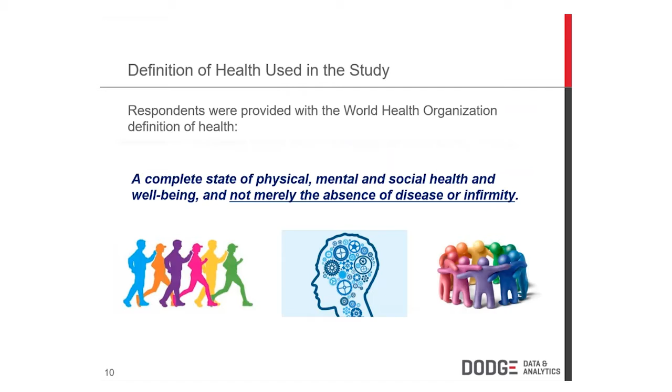But it really is so much more than that. You want to also consider, we spend so much time in buildings, you need to consider what the impact is on mental and social health as well, and how it can actually boost physical health, not just damage it.

So we wanted to also get a baseline, and we did this in the previous study as well, how much of a priority health is in the industry. So we asked our four major categories of participants. We gave them 7 factors overall, and asked them to rate how influential they were on the design and construction decisions they make. This list shows the percentages who said that each of these categories were highly influential on their design and construction decisions.

They were asked to rate them on a scale of 1 to 5. This is everyone who gave these a 4 or a 5. And as you can see, it is pretty telling. One thing is that when it comes to owners, architects, and interior designers, the good news is that at least 2/3 of owners, about 3/4 of architects, and 83% of interior designers say that these factors are highly influential on their decisions. And that is really good news.

On the other hand, though, you have to also consider how other things that might be competing for resources with healthier buildings, that might actually have conflicting interests in how you design the building, how they rate. And it's a little interesting.

When you look at interior design, health is clearly a top of mind issue. But when you look at architects, it ranks 4th. The gap between the highest ranking element, which is design and construction cost savings, and occupant health and well-being, is only 10 percentage points. And that isn't a huge gap for a 4-point difference. So you can see it still has a pretty strong influence in the architectural community.

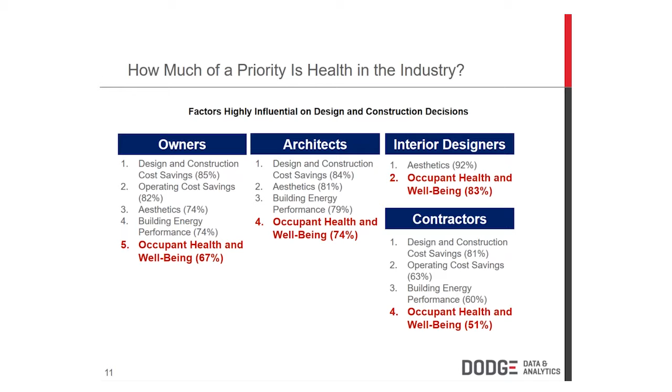And contractors, as you can see, really are not putting health and well-being as a very high, top of mind, highly influential factor in their decisions.

So why do owners care about healthier buildings, and what are they most interested in? Well, there's been a lot of studies over the years demonstrating that healthier environments lead to greater productivity. Certainly one of the most compelling was the one that came out last year from the Harvard School of Public Health with a lot of different partners. One fascinating thing is it's always been very challenging to measure the specific impacts of specific building features on white-collar work.

This study tackled that head-on by creating controlled environments they could compare, adjusting the level of VOCs at one time, the type of air quality people were experiencing at other times, between two groups in these controlled environments, having them do a series of tests, and really measuring the impact of things like lower VOCs, higher ventilation rates, and reduced carbon dioxide.

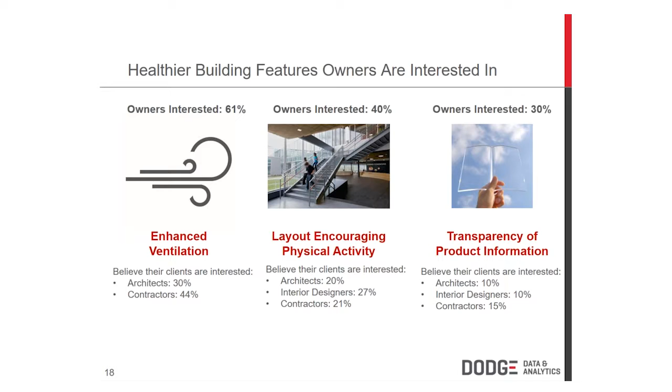What's really fascinating is when you take these top features that owners are interested in and compare the findings—we also asked architects, interior designers, and contractors how interested they think their clients are in these features. Consistently, the building design and construction practitioners underestimated the interest of their clients compared to the findings of the owners who participated in the study.

So you can see the groupings match, although there was a little bit more emphasis in our study on greater public awareness of the health impacts of buildings. That ranked the highest driver out of the choices they had.

Government incentives were also considered very important, but equal to government incentives in the study was more research on design and construction approaches that can positively impact health, and research on productivity impacts was also considered an important driver. Now what's interesting is owners really want to know more research on specific design and construction approaches that can positively impact health. That was number one for them.

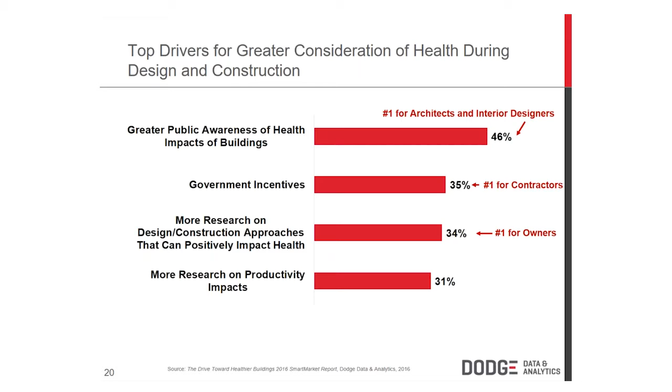Number one for architects and interior designers was greater public awareness of the health impacts of buildings, and number one for contractors was government incentives. So that motivation for being able to afford healthier building products for contractors was a huge influence.

A big part of our study also suggested that research and public policies may be important drivers of healthier buildings in the future. In addition to the main study I'm focusing on, the report also contains an entire secondary study, and this is the only reference I have to it here. So when you get your copy of the report, I recommend you take a look at this section because it's quite interesting about what public health professionals are saying on this issue, what's going on with their organizations.

But interestingly, when they were asked not what are you doing now, but what do you see being considered for the future, the highest percentage saw incentives for design that encourages physical activity being considered for future policy. So that is clearly going to be an area we're going to see a lot more of in the future.

Some of the biggest challenges that our respondents pointed to—this goes back to owners, architects, interior designers, and contractors again—by far there was one challenge. Budget concerns and limitations was ranked highest by over three-quarters of those who participated in the study.

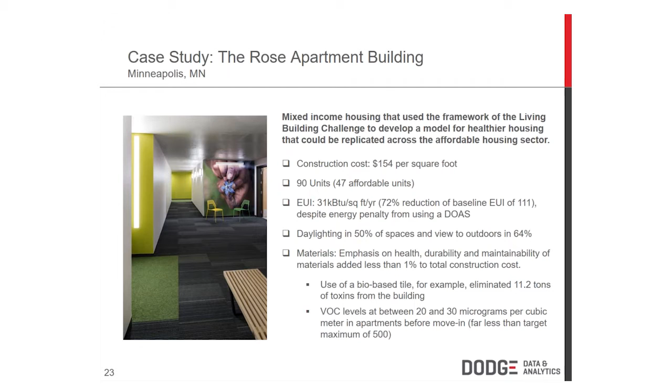But the way they did it, it added less than 1% to the total construction cost. One of the things they did to achieve this goal is they required that when they specified healthier materials, if contractors were going to substitute different materials, they had to submit documentation demonstrating those substitutions were healthier. And they said that not only did they land up with very healthy materials throughout the process, they actually landed up with better documentation on the materials that went in than they've ever had on any other project. So it was a really fascinating approach.

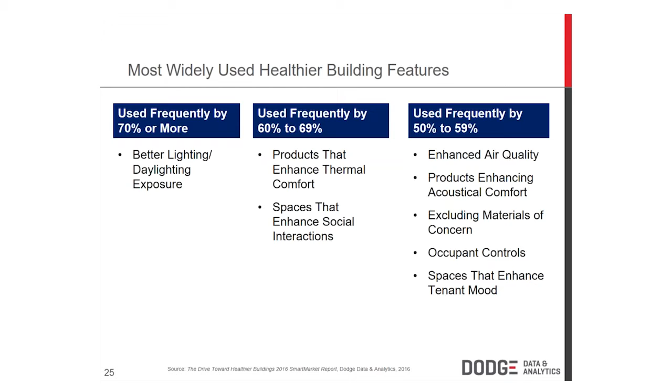We see about two-thirds saying they're also using products that enhance thermal comfort and, interestingly, spaces that enhance social interactions. I think if we'd done this study three years earlier, we wouldn't have seen spaces that enhance social interactions perform as strongly as they did here. We also see over half saying they're frequently using enhanced air quality, products that enhance acoustical comfort, that exclude materials of concern, that provide occupant controls, and spaces that enhance tenant mood.

We also asked, okay, that's what you're using now, but what are you likely to be using in the next 5 years? You can see for the most part this list consists of the same things we just talked about, that the things they're doing now are the things they expect to do in the future. However, there are at least two items that popped up on this most-likely-to-be-used list that were not showing up with such strong usage currently.

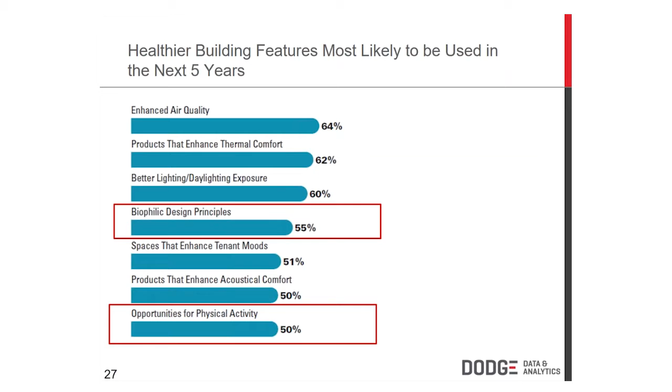One of them is biophilic design principles, and that is very exciting because there's been a lot of attention for years in the design community on biophilia, but this is the first time we've seen an actual result suggesting that people beyond the bleeding or cutting edge are seriously considering how to add this into their projects. In addition, going back to one of the key areas public health is focusing on, design for physical activity, opportunities for physical activity is also something the design and construction community is looking at as a growth area.

Now, we looked at 5 different sectors of construction: education, healthcare, office, hotel, and retail. Of those 5, it was clear that education, healthcare, and offices are very much top sectors for using healthier building products and practices. All 3 were very strong users of low VOC, daylighting, smart technologies for building operations, occupant controls, and mechanical ventilation strategies to improve air quality.

When we looked for differences by sector, a few things popped out in the education sector that were much more widely used than in the others. Natural ventilation - this isn't really that surprising given the school year and the opportunities it opens up. Access to natural features, though - this emphasis suggests we seem to be more aware that that's important when dealing with children or younger adults than once we put ourselves in the workplace. And then the idea that site design includes sidewalks and bike trails - again, that focus on physical activity that right now is better developed in the education sector than anywhere else.

And when it came to the healthcare sector, I was a bit surprised that the only product and practice embraced by a statistically significant larger percentage than any other sector was the use of art. I think the greater awareness of biophilia in the healthcare sector than in a lot of the others leads to this. The idea is that there have been studies demonstrating that views of nature - and they don't necessarily have to be direct views of actual natural scenes, they can be paintings or other reproductions - have had positive impacts on healing.

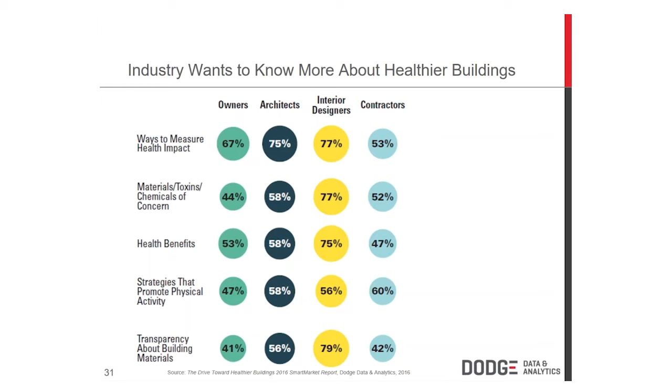So where are people getting this information? They're interested, they want to find out more, but where are they getting information on products? And where are the sources that they value the most? Where do they think they're getting the best information from? We can see from our findings those things don't always match up.

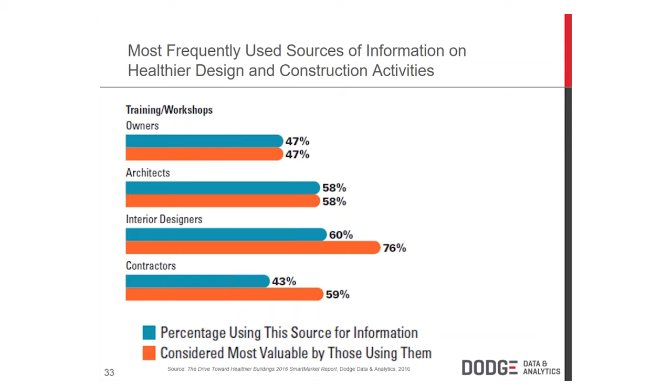On the other hand, when we look at training and workshops, we still see pretty high levels of people using these for information, but you can see that especially among interior designers and contractors, and also among architects and owners, this is considered a pretty valuable source of information.

Finally, when it comes to healthy product labels—we gave them several sources of information beyond these, these are just the top ones—you can see that, again, not very many owners are using them, but a pretty healthy percentage of owners who are using them consider them among the most valuable sources of information they have. Architects and interior designers, about half are using them, and about half of those consider them very valuable. But contractors, it's only about a quarter who are using them, and only a quarter of them consider them very valuable at all. I really want to hit on this point for a second.

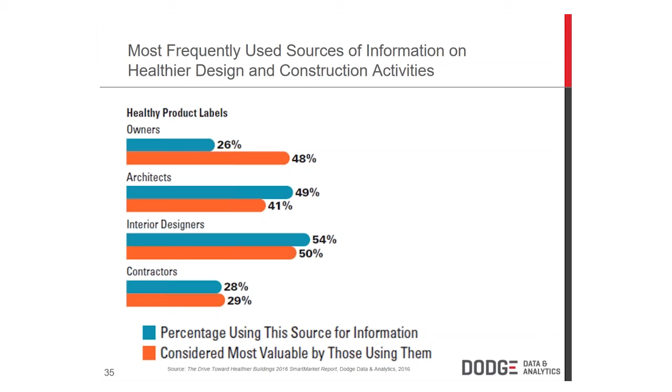This is critical because you can design the healthiest building, you can specify materials that meet very rigid standards, but you need to make sure that intent is understood by your contractors and that substitutions aren't made where the product functions just as well in terms of energy use, function, even aesthetics, but perhaps doesn't meet what your goal was for health. This is a real touch point in the industry right now.

So when we're looking at what conclusions we can draw here, certainly for commercial real estate, health is becoming an increasingly important part of being sustainable. In particular right now, for firms looking for ways to distinguish their sustainable practices, healthier buildings are an opportunity for designers, contractors, and BPMs to have a competitive advantage in green building. Owners find improved employee satisfaction and engagement the most valuable benefits of their healthier building investment so far.